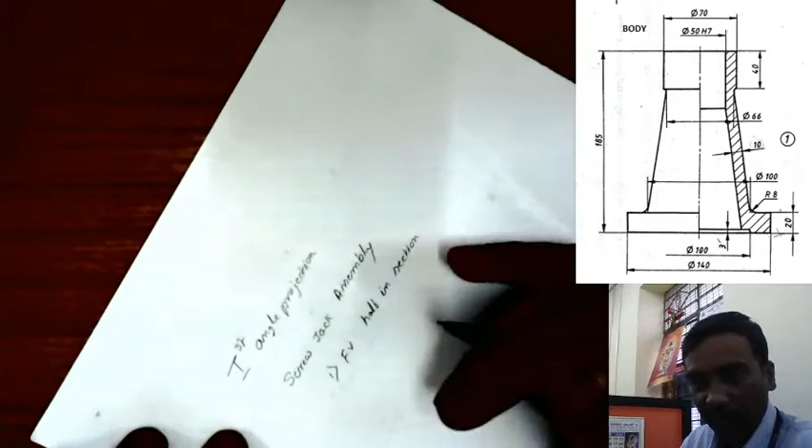So the method of projection is first angle projection, and it is screw jack assembly. So two views are required. One is front view with half in section. So it is not mentioned right half in section or left half in section, so either is okay, but since it is not mentioned, you can take any half, right side or left side half in section. So second one is the top view.

Okay, so the sheet is A4 and the drawing should fit in this sheet. So let's check out the dimension, maximum dimension required here. So let's see, this is the space required for front view, and top view is this. Side view is not asked, so I am not drawing side view here. So it is 350 mm, and the maximum dimension that comes here is 140. So total height is 490. So it is not possible to fit in this sheet. So this much space available is only this much space in A4 sheet, so can't fit in A4 sheet.

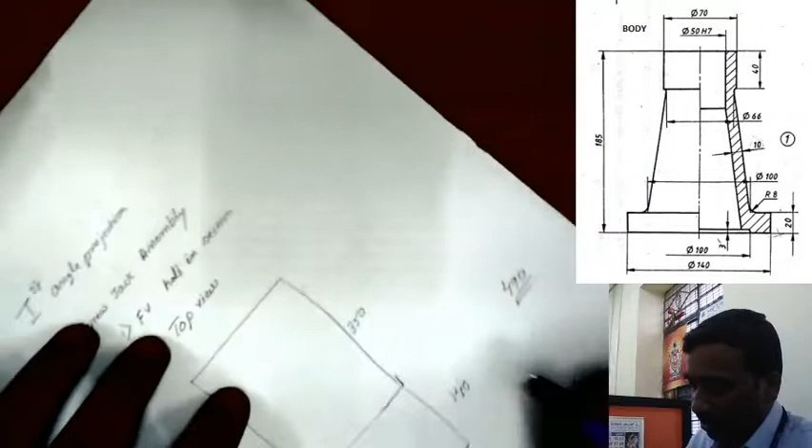So we'll take it scale 1:2. So that means whatever the given dimensions, we need to plot for half the dimension. That means multiplied by 0.5. So except angles, the angles will not change. Don't scale the angles, they will remain same. Only other dimensions except angles, you need to take half.

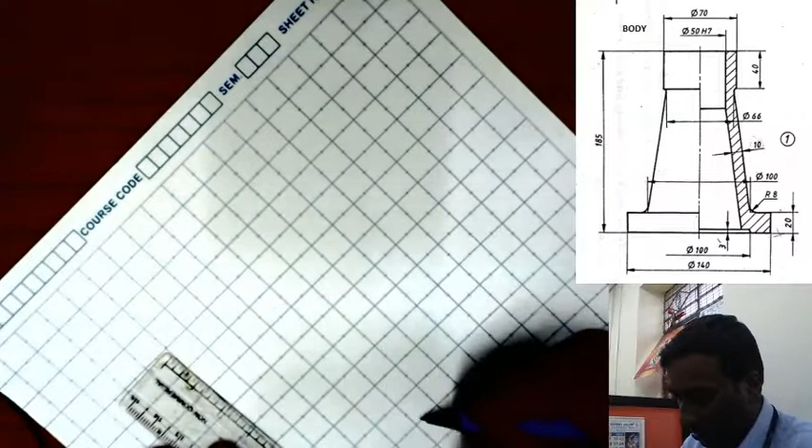So to start with, half of 350 is 175, and from the top plane here I will measure 170, 180 I will take. Okay, so 1 2 3 4 5 6 7 8 9 10 11 12 13 14 16 17 18. It comes up to here. And here required is 70 mm. 1 2 3 4 5. So it goes below this. So what I will do, I will take 70 mm the bottom, and remaining portion it will cross this top line, that's okay. So I will take 70 mm from here. This to 70 mm. So I will take this as the reference line.

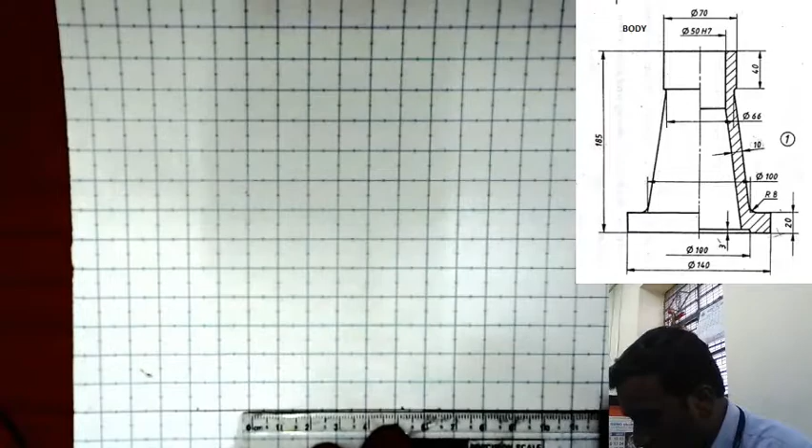I'm just doing this to fit the drawing in the sheet, that's all. Okay, so you can take any scale. If not mentioned, you can take any scale, but if it is a bigger sheet, you make it a bigger drawing. So since here the sheet is A4, I am fitting the drawings in this A4 sheet with this scale. Okay.

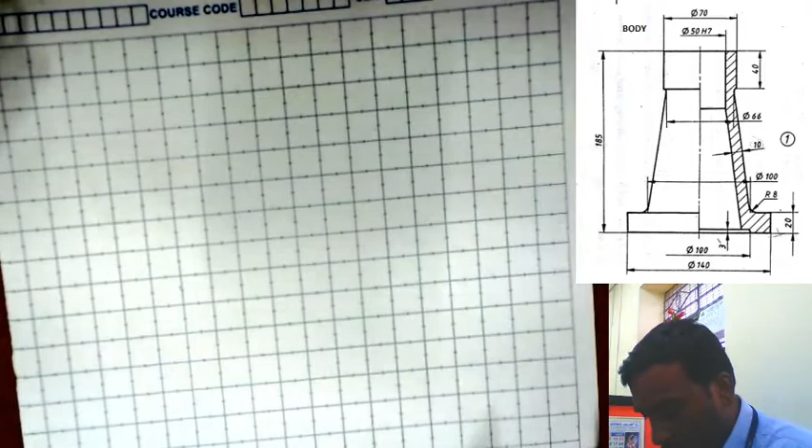So to start with, it is from the body of the screw jack. So the dimensions are 185 vertical height, and maximum diameter is 140. So I will start from the base, which is 140. So it is 70 mm. So I will mark this axis for this. This is the axis for screw jack body.

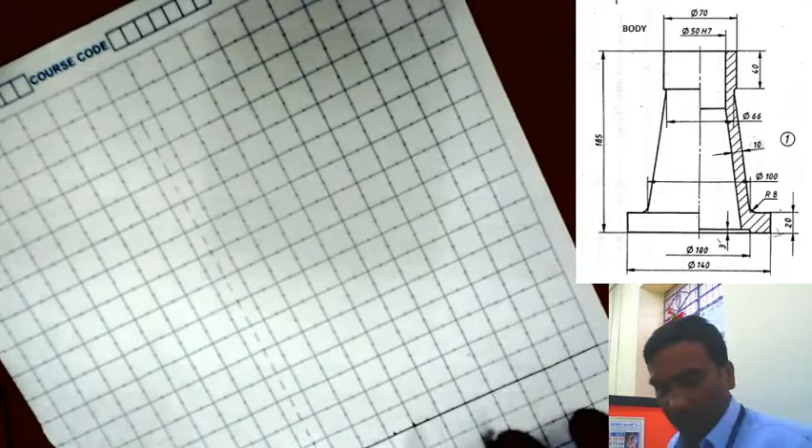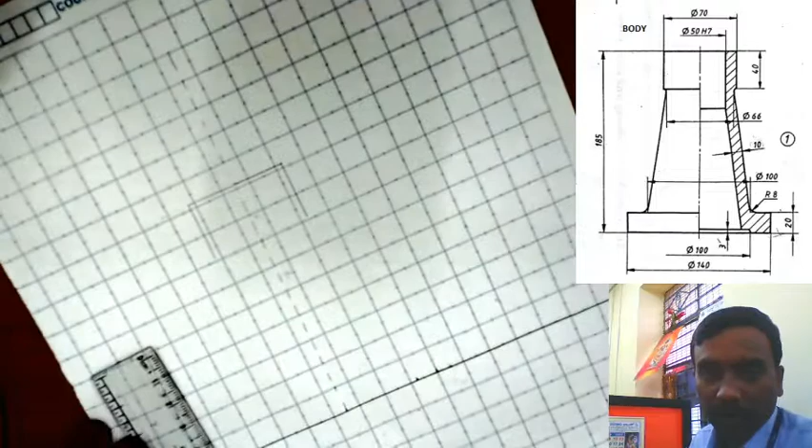So vertical height is 40 mm, so it is 20. So on the bottom plane it is 20 mm height, the thickness is 20 mm, so it is like this.

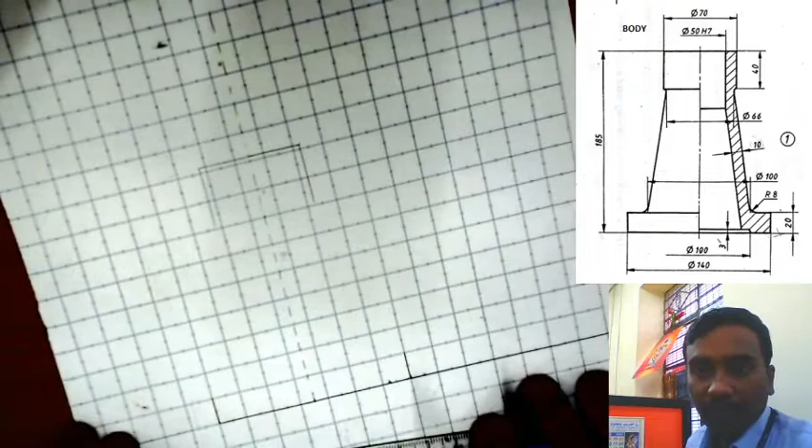So here it is 50 mm, this dimension is 100, so reduced to 1:2 scale it becomes 50 mm. So taking 25 mm on either side, like this, and then I need to measure this dimension here. It is 33, half of 33 is 15 plus 1.5, 16.5. 16.5 on this side,

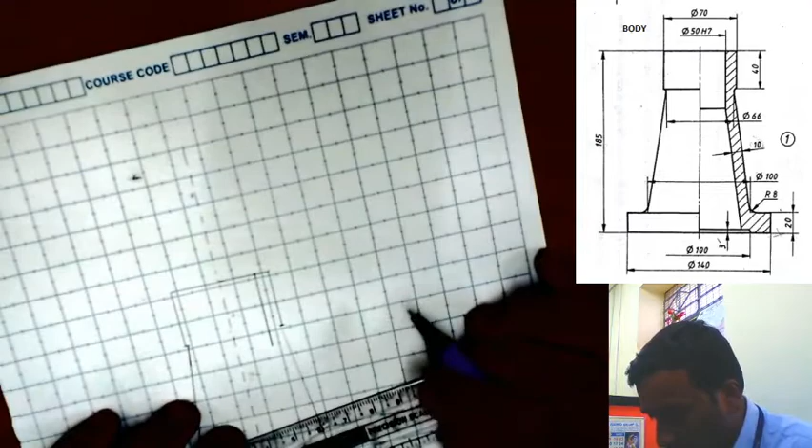then measuring 12.5 and showing the inner detail here, 10, 12.5, and I will just draw a line. So it is not given how much depth it will go there, but I will just draw a line here, but the thickness is given here. Okay, so thickness is given, thickness is 10 mm, so it is measuring 5 mm here. I will draw a line parallel to this. So to draw parallel line I will measure at two locations, then I will join these points.

So like this here. So at the bottom it is 1.5 mm, and at a distance of 25 up to here.

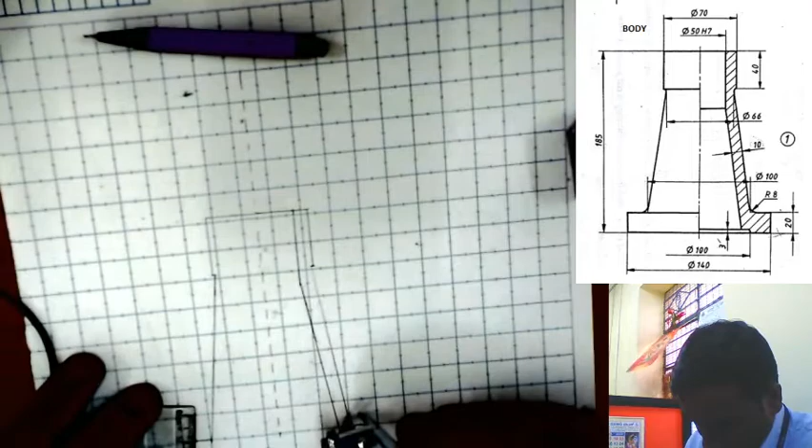So radius is 4 mm. Please use pro circle for this. For small arcs and circles, please use pro circle. So tangent arc, tangent to two lines here. In pro circle, you can just align the circle to these two lines and you can draw tangent arc. Similarly on this side.

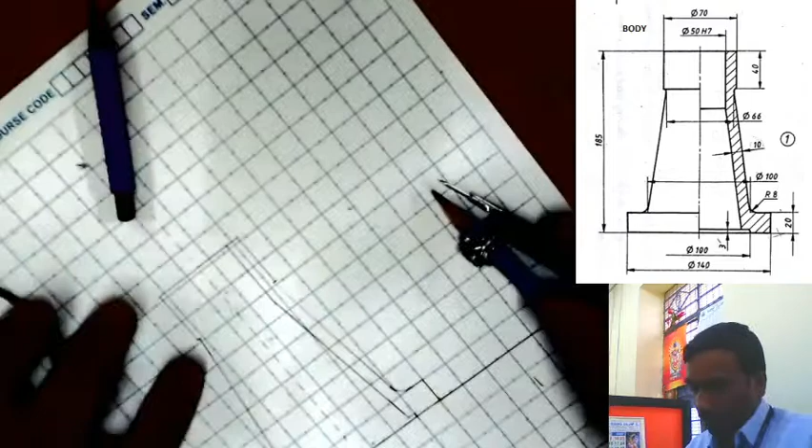This is like this. So now this right portion I am showing in section because front view with the right half in section. So I am showing this side in section. So here this portion is a section.

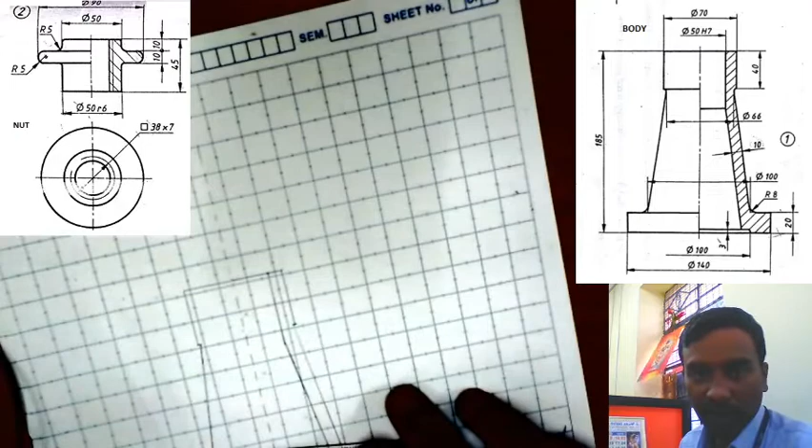Okay, so now I will insert nut in this. So the nut drawing detail will be given. So what is the criteria for assembly here is the nut should go inside. So first criteria is the axis should be aligned and then it should place on top plane of this body. So that is the constraint. So axis alignment, axis of the nut and axis of the body should align and then the bearing surface should coincide. So the bearing surface, the diameter is 90.

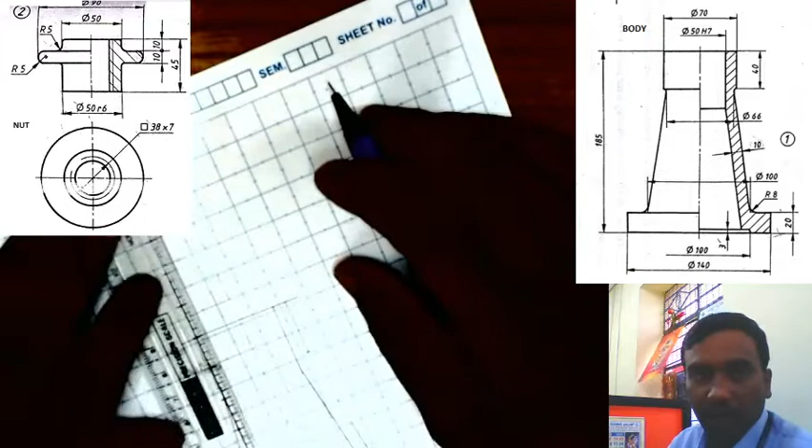So we will take here 45. Half of 45 is 22.5. 22.5 on this side, 10, 20, 10, 20, 22.5, it is up to, and 45 mm, it is up to here. So then this thickness here is 10 mm, so it is 5 mm, then here, okay,

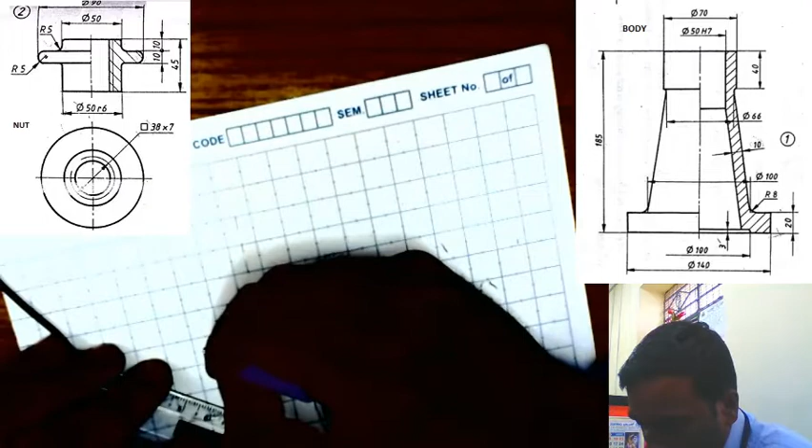so it's a good practice if you use mini drafter and do on the drawing board. Okay, so since it's a limitation here and you need to use this A4 sheet, it's like this. Okay, so in using mini drafter and drawing board you can do very fast with very good drawing sketch. So it is 5 mm thickness here. Okay, on sides should be actually it's very small, so I will draw just by free hand. For smaller detail you can show with freehand drawings. Okay,

so inside it is a threaded region, so it is of a square thread of pitch 7 mm. So here actually you should refer to screw thread chapter for this drawing here, and measure the minor diameter, what should be the minor diameter for this screw thread for this configuration, and you should draw as per that. Okay, so since it's a very minute detail, I will take approximate value.

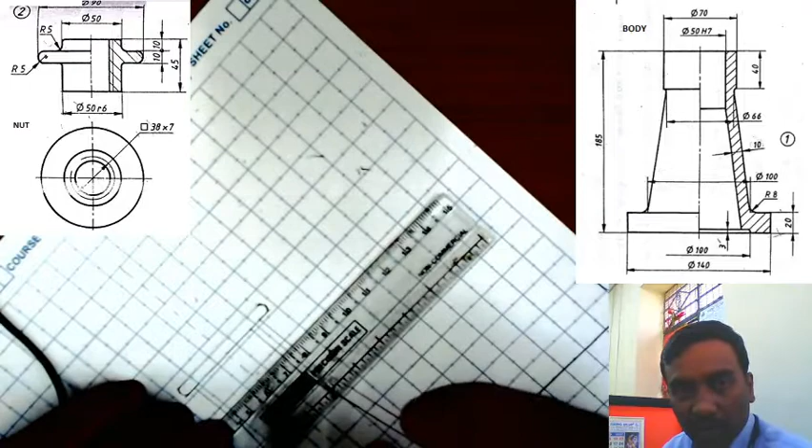But in software you make sure that the feature is available for threaded, so assign threading for inner surface of this nut, that is a square thread, so nominal diameter will be 38 and pitch is 7 mm. So that feature please assign while using software. So here in drawing I can't make out that minute details, so I will take approximately here. So it is 38 means approximately 19, so half of 19 is 9.5, the height is mentioned.

From there it is 45 minus 20, it is 25 from this surface. So from this surface it is 25 below this line. Okay, it is up to here, and I will just extend this, and also this line I will extend to the top portion, and it is for 10 mm, that means 5 mm, should be up to 5 mm only.

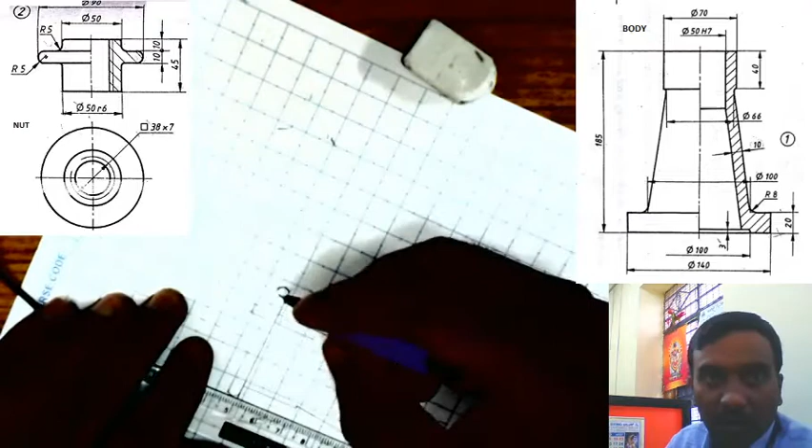And it's a small curve I will draw by freehand, but in actual practice, that is the radius 5 mm, so please make it radius 5 in assembly while using software. Okay, so in manual drawing you can just draw freehand like this, and here I will just reproduce this dimension on that side using compass. And on this right,

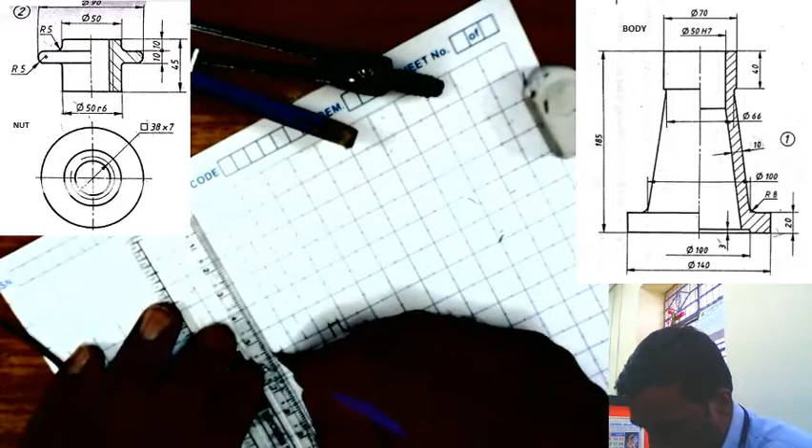Right, so this line is not visible, so it is like this. Okay, I will just extend this up to the axis, and also this line is also visible up to axis, it is visible. So it's like this. So now the spindle will come.

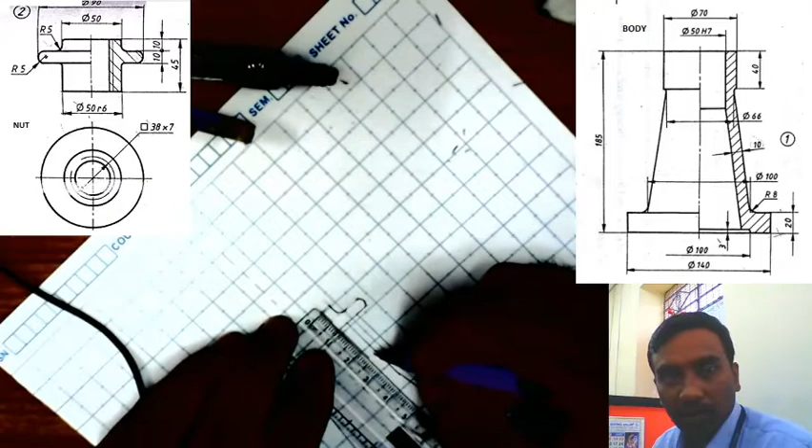So like this. So right portion in section, a left portion without section. So it looks like this. So now here I need to show the screw spindle. Screw spindle should come here.

So for screw spindle we need to maintain, as I mentioned earlier, the dimension to be maintained is 350 mm. So total height is 350 mm. So 350 mm means, just need to calculate this. Okay, so it is 350. I will erase here afterwards. So total height is 350. So 350 means to take the dimensions of all parts, so it is 185, so total dimension is 185 plus 20.

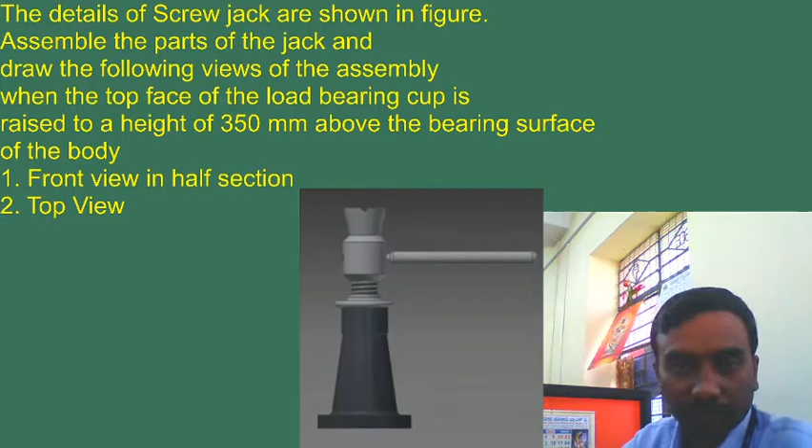So I am taking these dimensions in assembly. So we can make out this total height from the bottom plane to the top plane should be 350 mm. So I am just measuring the total dimension, and thereby I calculate the length of the screw that is outside the nut. So this is the length that is required so that it matches with the total height of 350 mm. So for that purpose I am calculating the dimensions here.

So it is 185 plus 20 plus the screw spindle dimension, the portion of the screw spindle that goes, you see, some portion will go inside the nut and the body. So it is 83 minus 13 is 70 mm. It is 70 mm plus, and then the cup will come. So cup dimension is 42. So total is, I just calculate. So total dimension is 185 plus 20 plus 70 plus 42 is equal to 317, and 350 minus 317 is 33 mm.

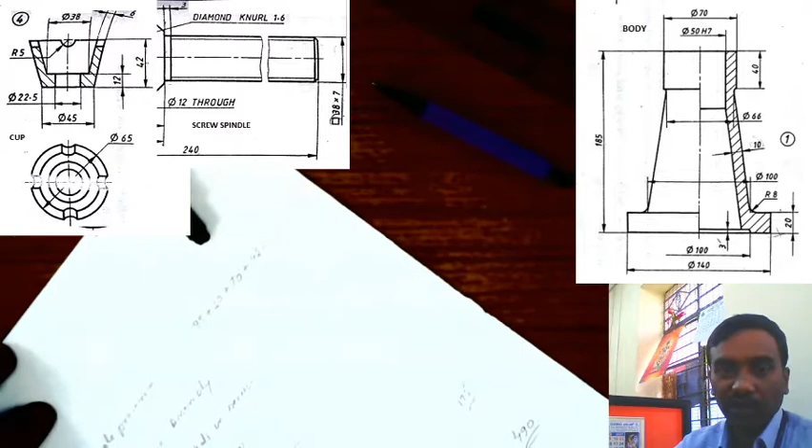So it is 33 mm length of the spindle that is outside, 33 mm thread portion of the screw spindle that is outside from the nut. So I need to maintain this distance here 33 mm from this. 33 mm means half of the dimension is 16.5 mm. So I will measure 16.5 mm from here, and so this is the reference. From here I need to show the screw spindle, so length of the screw spindle.

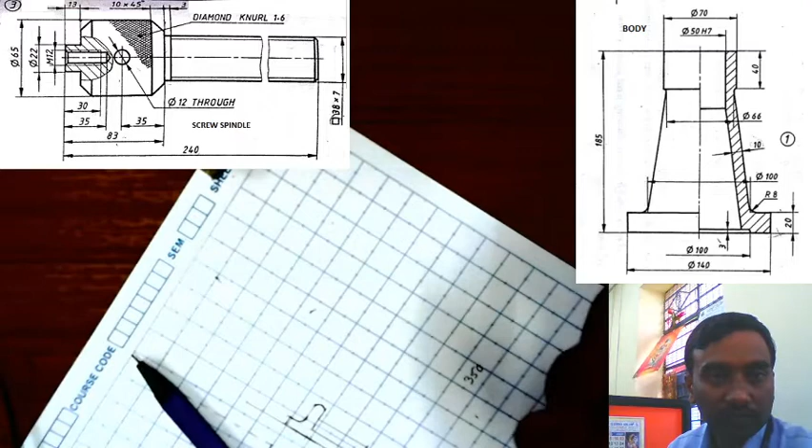So next is the screw spindle. So screw spindle is 240 minus 83. 240 minus 83 is, so how much? 240 minus 83 is 157. Okay, 157 divided by 2, 78.5. So this length is 78.5.

Okay, sorry, that's not correct. Actually it is 240 minus 70. Okay, so sorry, it is 240 minus not 83, because that projection length they should neglect where the cup will come. So that 13 mm you should not consider. So here 83 minus 13 is 70. So 240 minus 83. Actually no, that's correct, sorry. So that's correct, it is 78.5 mm length. So half of

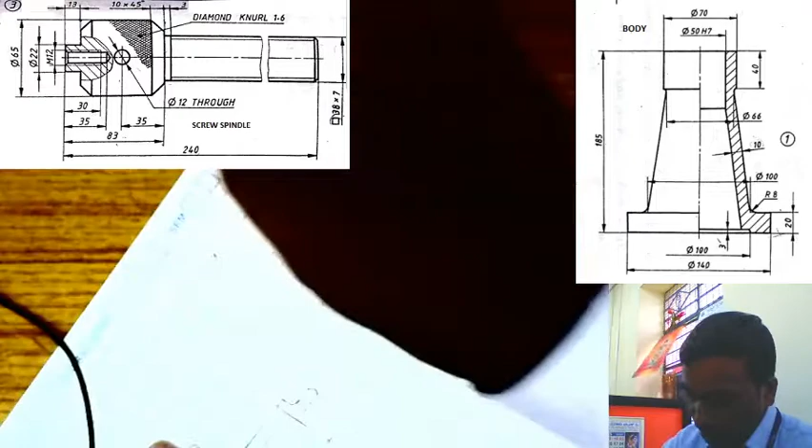78.5 mm, 76, 77, 78.5, like this. Reproducing by copying this dimension on other side.

No, sir, you did not join. Now you came. Okay. No problem, no, sir. No problem. So, I will send the link.

Here, and then you need to take this chamfer into account. So 1.5 mm, after 1.5 the thread starts, so take approximately 1.5 mm. So thread starts from here. So threading, this bottom portion is threaded region. So here I will show thread. And this chamfer, it is approximate dimension.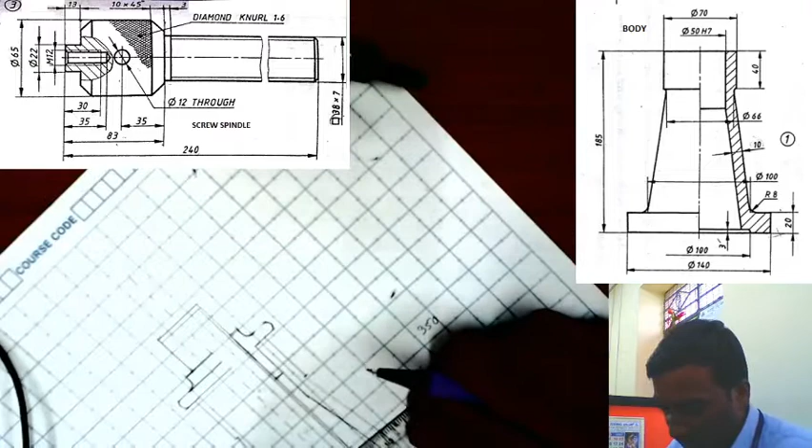Actually, to be precise, you should take the dimension referring thread forms, and there you should refer the square thread for 38 mm nominal diameter. What is the minor diameter, you should check, and you should plot as per that. So here I am just taking approximately and showing these dimensions. Okay,

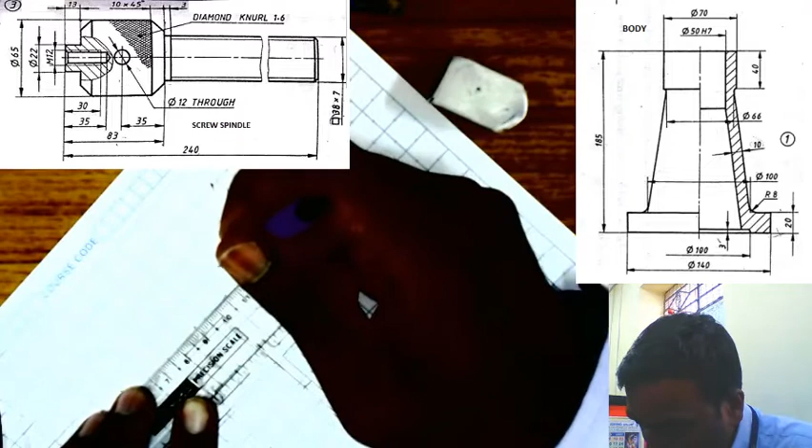so then there is 10 mm, so 5 mm step here from the axis. So here this diameter here is 65, that is 32.5, 16.25 on either side. So I can't measure 0.25, I will take 16, but in software you can do that. It is 16 mm, 16 mm on either side. Okay, so

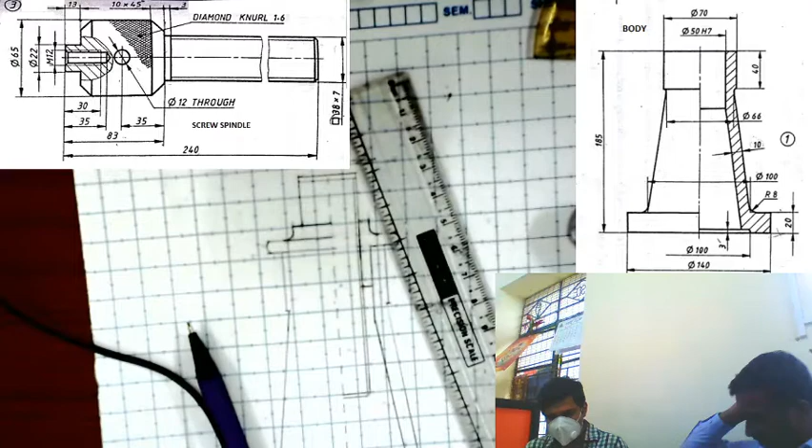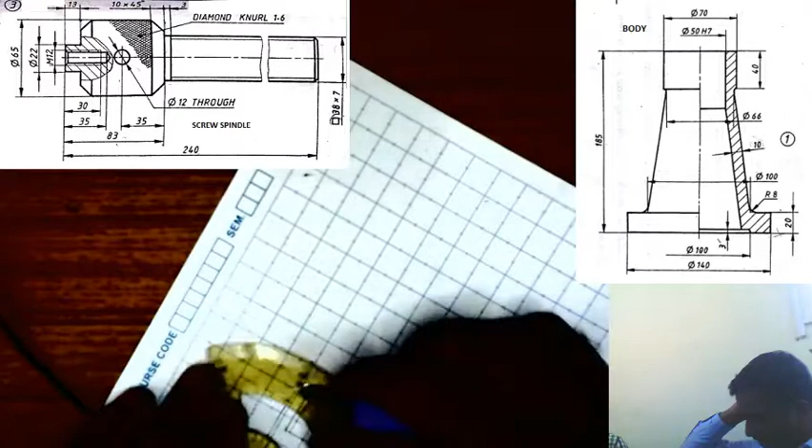put this drawing, a continuation of this. So here the width is measured, yeah, right. So and it is at an angle of 45 degree actually, chamfer at an angle 45 degree. So measure 45 degree, 40, this side also is 45 degree.

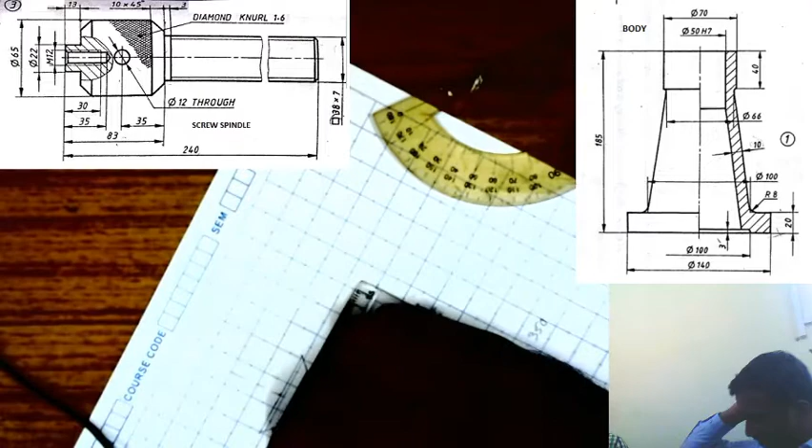So the height of screw spindle here is 83 minus 13 is 70, and 70 minus 10 is 60, so it is 60 mm, means 30 on this side here. The 30 mm like this.

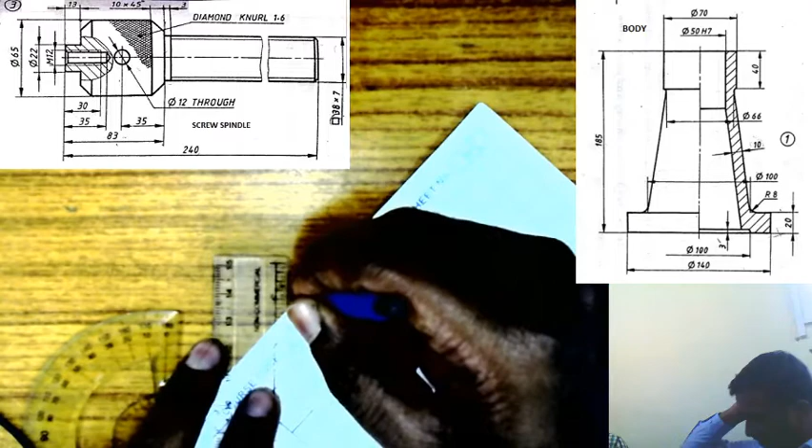Again 5 mm you need to measure from here for chamfering. Taking 45 mm, sorry 45 degree. It's going out of the page. Just similarly on this side it is taking 45-degree chamfer on this side.

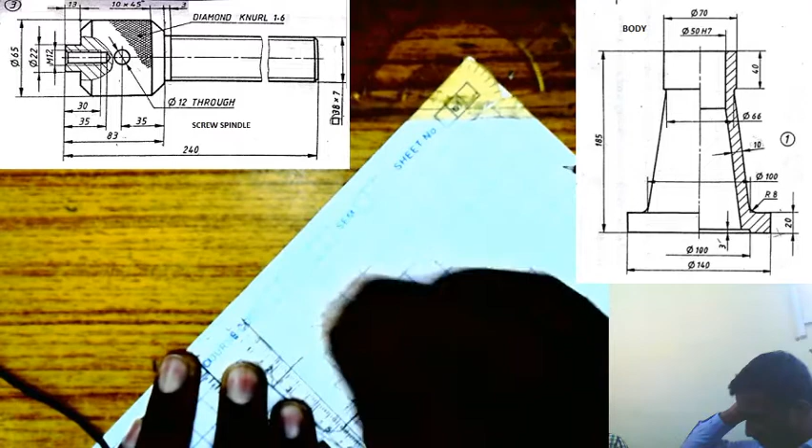Okay, so now drawing the cup over this, since this is sectioning, so this line I can erase up to here. Similarly here, okay, to show section inner details there. And then

so hole for Tommy bar is at a distance of 35 mm from this point here. So 35 means 17.5 mm. Here. So I will take this as a reference. So Tommy bar will come here like this. Okay. So take the, before that I'll just complete this.

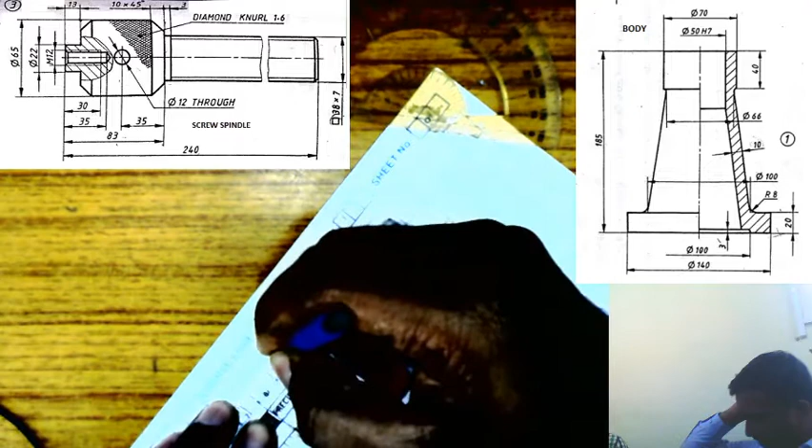So here the projection on the screw spindle is of thickness 13 mm. So 13 mm means 6.5 mm. So 6.5 mm projection here is up to here, and there the diameter is 22, so it is 11. So to here like this. On left side it is not visible because that goes inside. So right side is visible because there it is the sectional view.

Then the hole of diameter 12 mm, so M12, so it is 3 mm. Depth is 35. 35 means 17.5.

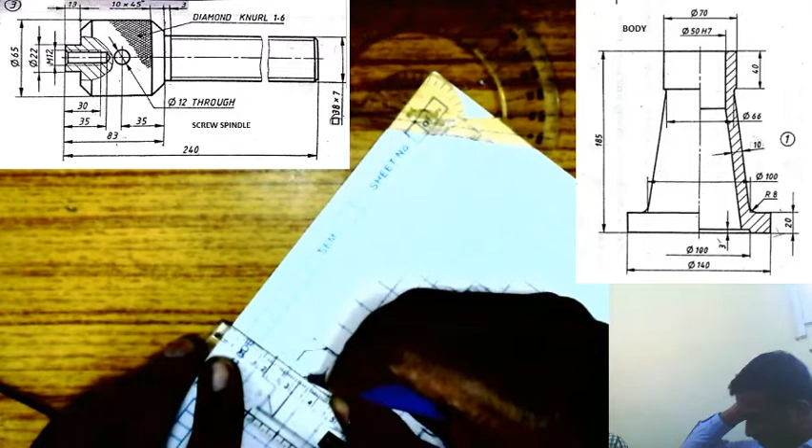So total depth should be 35 mm, so it is 17.5, and draw like this. So in this also washer and the screw will come. Okay, so washer, special washer, and CSK screw.

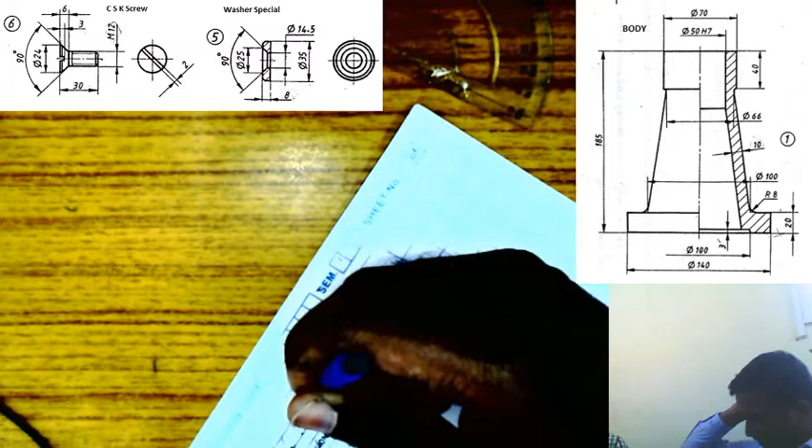Okay, so the diameter of the washer is 35 mm. So 35 mm is the diameter. So it is 17.5. So 17.5 will fit here. Inner diameter is the inner diameter is 14.5 means 7.25, 7.25 mm. So it will fit above this.

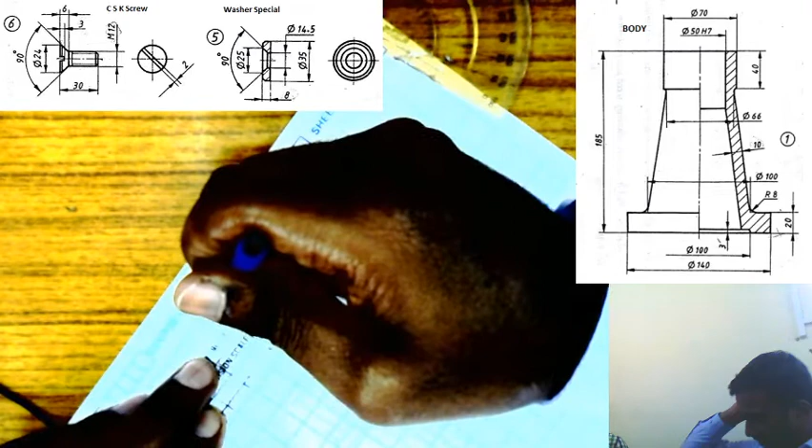Okay, so on this the thickness is 4 mm. I will show only the half portion. And then the screw will come here with CSK screw. Its length here is 15 mm. It is up to here. So this is the CSK screw. CSK screw with the washer.

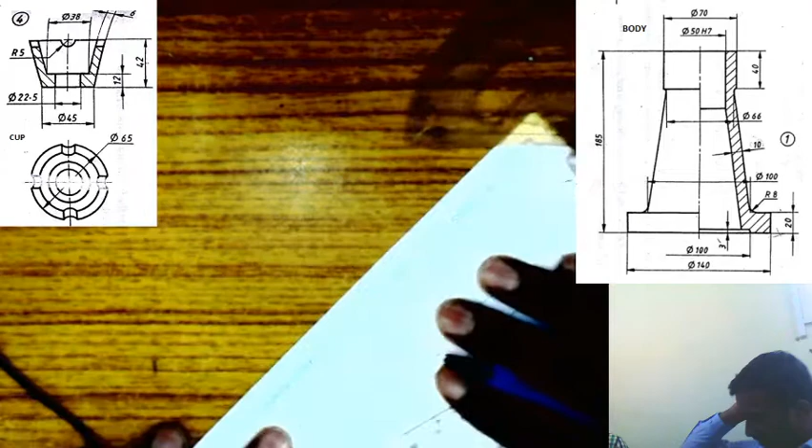So now the overall height is 21. Is it visible properly? Okay. So it is like this. So height measured from this point, it is 21 mm. So the cup will be placed here. Okay, so the bottom plane of the cup should match with this. Okay, so it exactly fits here from this point to this point, and height I will measure from here. It is 21 mm. So 21 mm is up to here. It is going out of the page. It's okay, can't do anything.

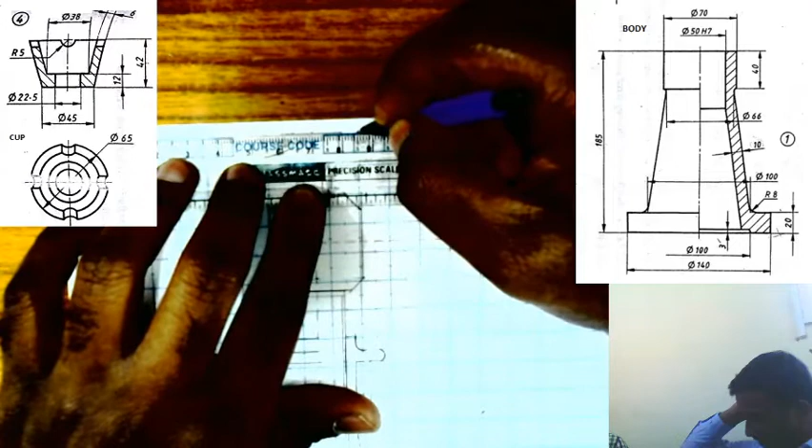So here the diameter of the top plane of the cup is 65 mm. So I will take it is 32.5. It is 16.25 on either side. So it is 16 mm approximately. I will take 16 mm from here. It is 16 like this, and then should connect these two ends. So the inner details on left side are not visible because of the cup, so I will erase this.

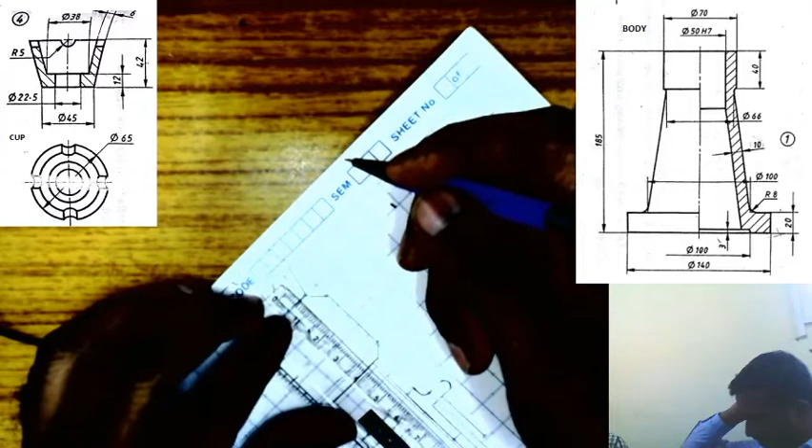So this is a circle of diameter 5 mm. So I will just draw freehand. Please use pro circle for this. And then on this side the thickness is 3 mm. It goes like this: 1, 2, 3 mm line, and it should be parallel to the inclined line. Take it approximately like this, and the thickness at the bottom is 6 mm. So it matches with this place of washer, so it is like this. Okay, and then here it is to a depth of the groove, so it is like this.

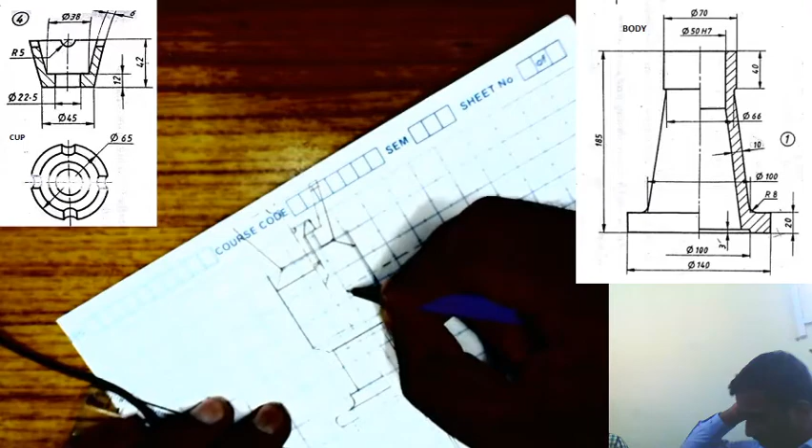So this is the assembly drawing of screw jack. So it's still not complete. Hatching should be done. So this portion is the CSK screw, and it is threaded. I will show thread on this region here with chamfer at the end, and then like this. Okay, and then so this portion is the special washer, and this portion is screw spindle, and this is cup. Okay, so the drawing is like this.

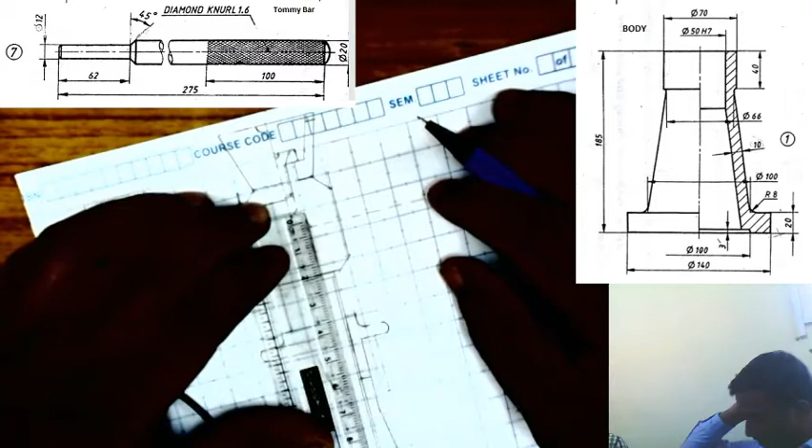So next part is Tommybar. So place for Tommybar is here. It will go inside through this, along this axis here. So it is to a depth of 31 mm. Okay, so that's optional. This dimension can vary. Okay, so I will take to this distance. Yeah, let it be 31. So I will take to this length 10 mm. So the diameter should be 6 mm like this. Then we will extend this to a length of 31 mm.

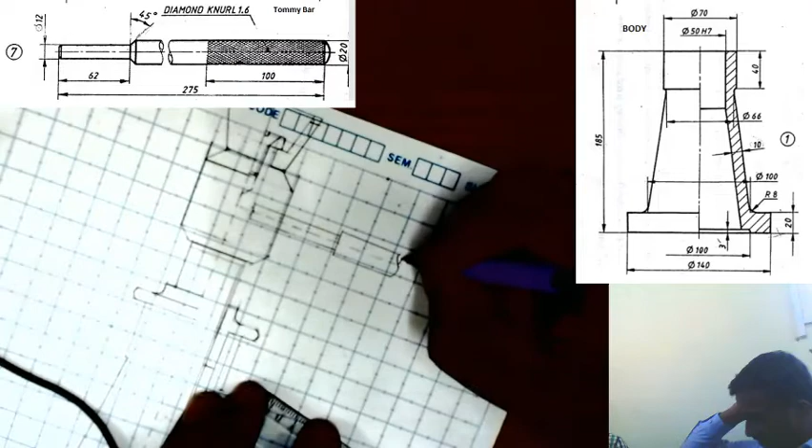So here the total length is 275 mm, so you need not show the complete length. So here diameter is 20, so it is 10 mm on either side, sorry, 5 mm on either side, so like this. And then I will show to some length, because for longer length you need not draw to full dimension, you can show with cut section like this. So I will just draw like this, that's okay. Okay, actually it's not proper, it's not exactly horizontal, sorry.

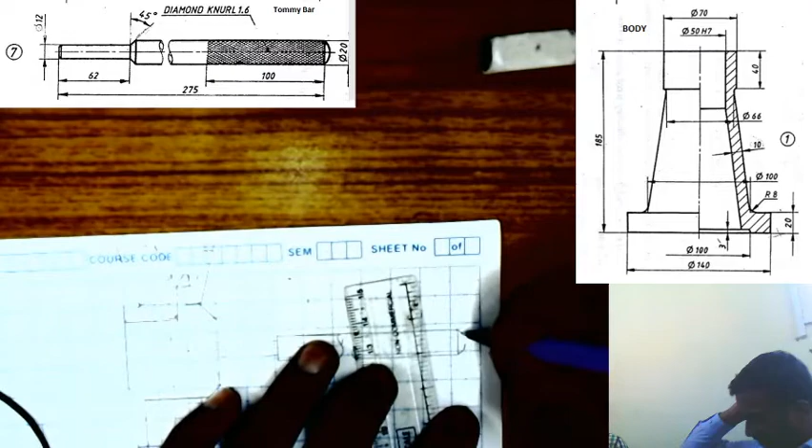So you can show knurling here, so some portion you can show with knurling. So like this. And then hatching is to be done. While hatching, take care that you differentiate the parts. Okay, so hatching style for two adjacent parts should not be of same style, it should differ. If someone looks into the drawing, they should easily be able to make out the difference. Okay, so that's why hatching style should differ. So up to here it is a screw spindle, and then here it is the special purpose washer. So here I'm showing different style of hatching like this.

So it is like this. Okay, so it should be like this. Okay, still if you can do a better drawing, I will be very happy. So please do a good drawing. Right, right. So this is the front view with half section.

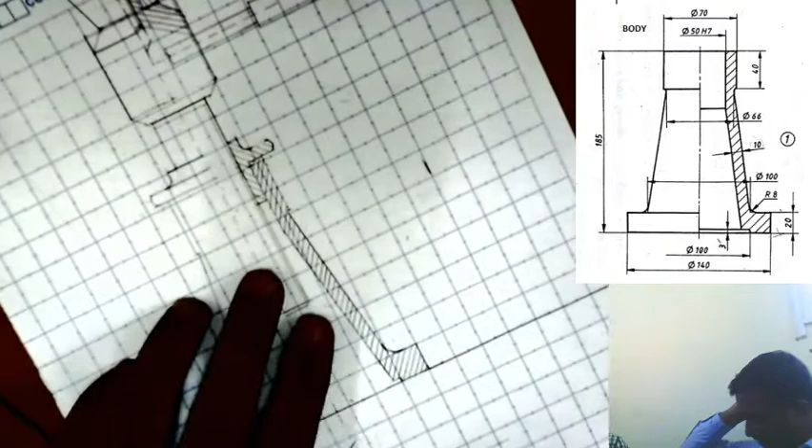Okay, so now to draw the top view. So top view should come below here. So I will take the projection from the front view here. It's like this. I will take somewhere here. Okay, so actually I made it darker. It should be lighter; for recording purpose I'm making it darker. Reference lines should be thin.

Okay, so here, how to draw the top view? So see, top view, you should imagine that you are looking from this end. So you're looking from this end, that means like this. When it is viewed in this direction, what I can see is the top plane of the cup, and then I can see the Tommy bar, and this portion is outside. See, it is coming outside.

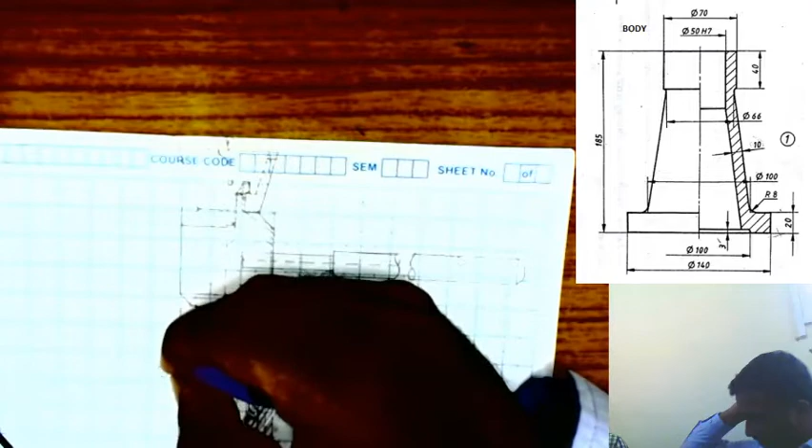Okay, so screw spindle is up to here. So this is outside, so you can see this portion, and also this base portion you can see. So that's why first I will start with the base dimension. See, you need not take a dimension using scale. You can just copy the dimensions using compass. So make use of the compass like this. To copy the dimension, this saves a lot of time.

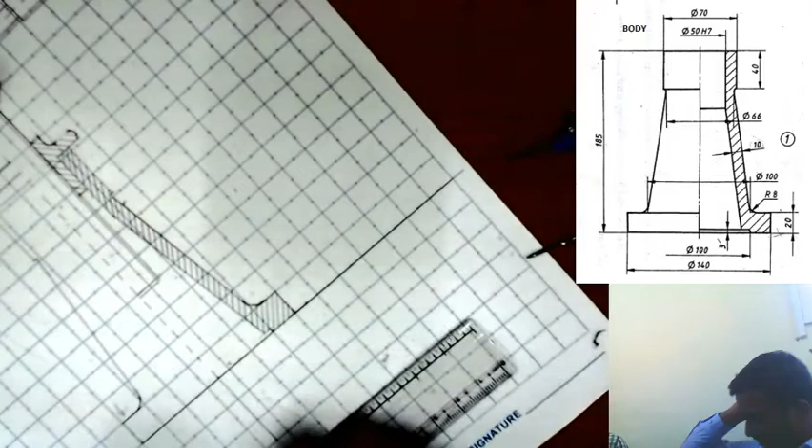So it is this dimension. Okay, so I will take here, but it matches there. So that's not correct because it matches, so I need to lower this line. So I will take here. Okay, so I will copy this dimension here from here. So this base is the circle, a circle like this, and then I'll take this dimension.

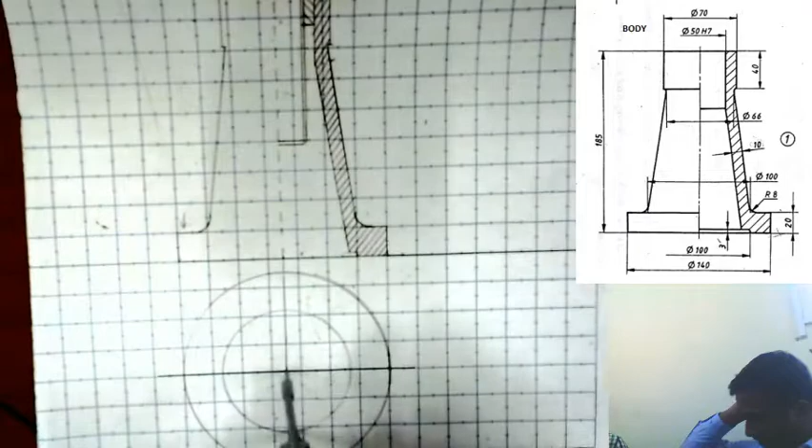It is this dimension, the dimension of the nut here. Okay, and then the top plane of the cup comes here, and then the inner surface of the plane, it is this dimension, inner surface.

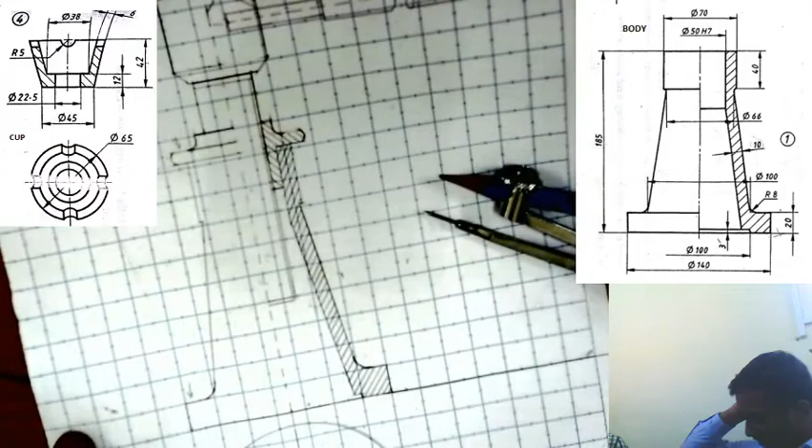Okay, what I am drawing here is the top view of the cup. So top view of the cup is this one. You can make out, you should draw like that. Okay, so on four corners I will just draw; actually it is 5 mm radius, so 2.5 mm on either side. I will just take it approximately: 2.5 mm, 2.5 mm.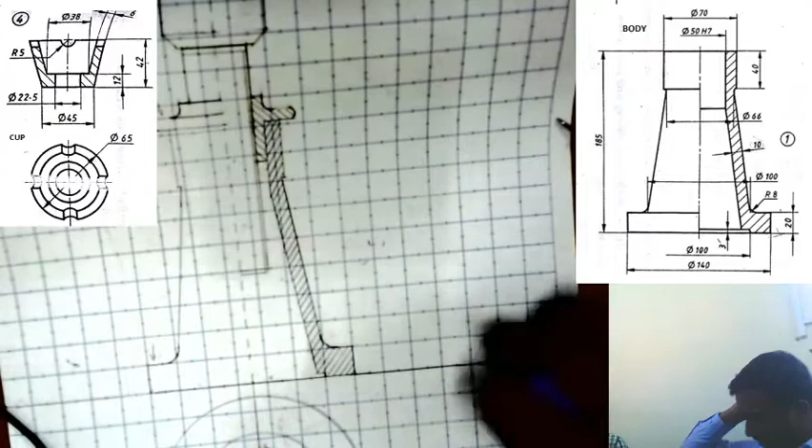So okay, I can just extend this to the bottom plane. Okay, similarly on sides it is 2.5 mm and 2.5 mm. So like this. Okay, so then the Tommy bar. So inside, the washer and the screw are also visible. So I will just draw a small circle here, showing screw and washer. This circle is for washer.

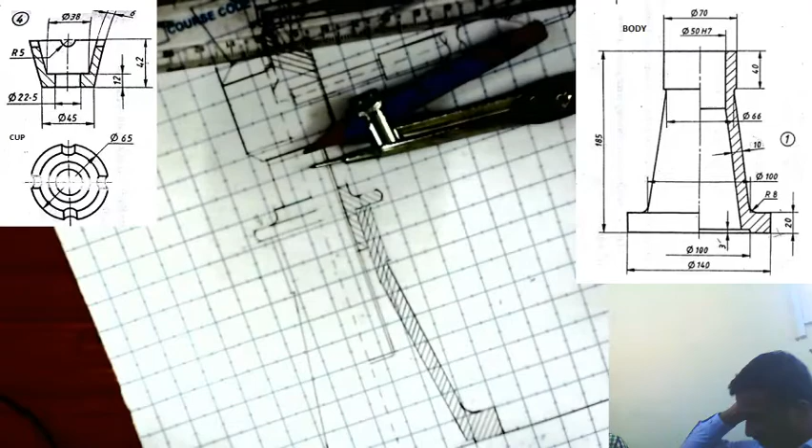Okay, so one more circle. So this is a very small circle, so, sorry, okay, I can't draw that anyhow. See, it will be a small circle showing screw. You can use pro circle for this purpose. So then here comes

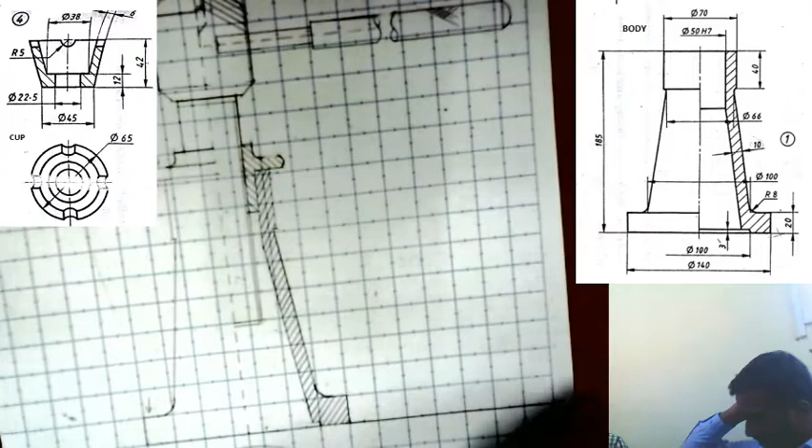So the top view of the assembly will be like this. Okay, so Tommy bar, and inside this is washer and screw, and this is the top plane of the cup, and this is the nut surface, and this is the base part of the body. And the Tommy bar extension you need to show like this. So this is the top view of screw jack assembly.

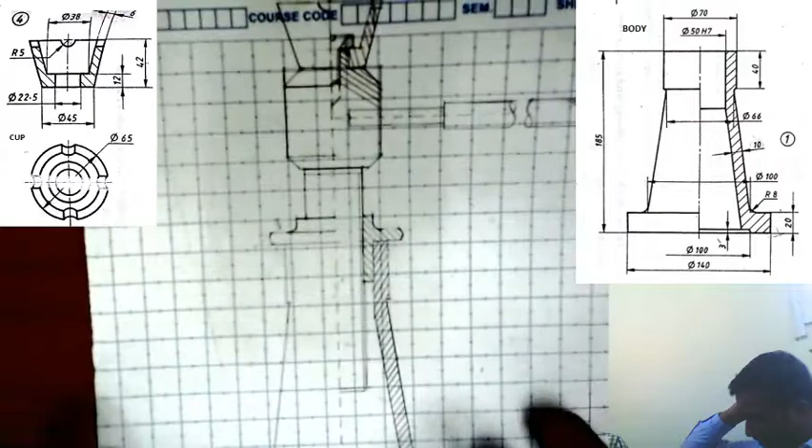So front view is like this. Okay, so total assembly is like this. I can't show it like this anyhow. Anyway, see, it is just the front view, and then the top view of the screw jack assembly.

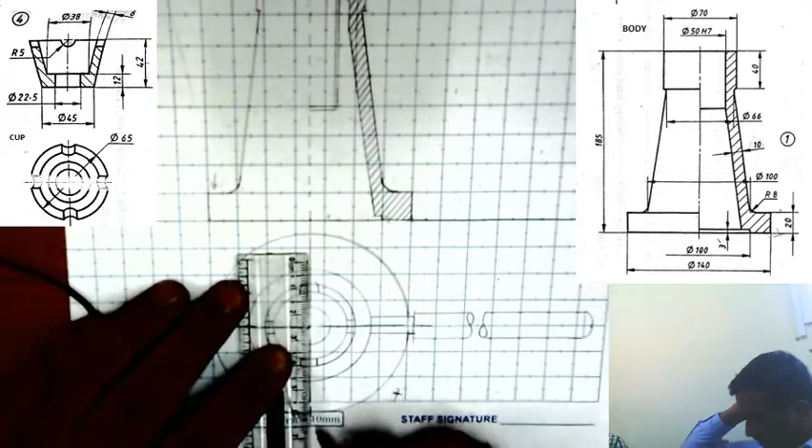Okay, so here the front view is in section, so I need to show the section plane. So what section will give this view? If I remove this 1/4 of the portion, then this 3/4 portion will give this front view. So that's why this portion is to be removed for this view. So the section plane will be like this.

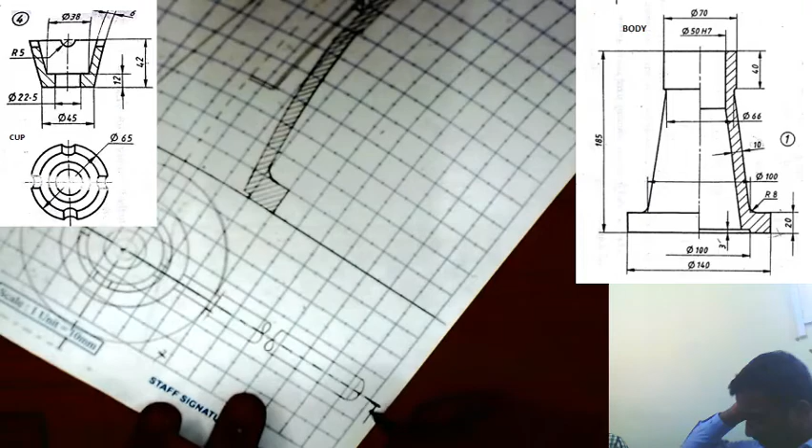It goes up to the center, and then from there it is this horizontal line. Okay, so I will make the ends thicker. Here also, then showing arrowheads here. So drawing is going out of the boundary. So like this, I can give the name of the section plane.

Okay, so along with this, you need to show the major dimensions, and then part numbering and bill of materials with this. So this completes this demonstration on sketching of screw jack assembly.